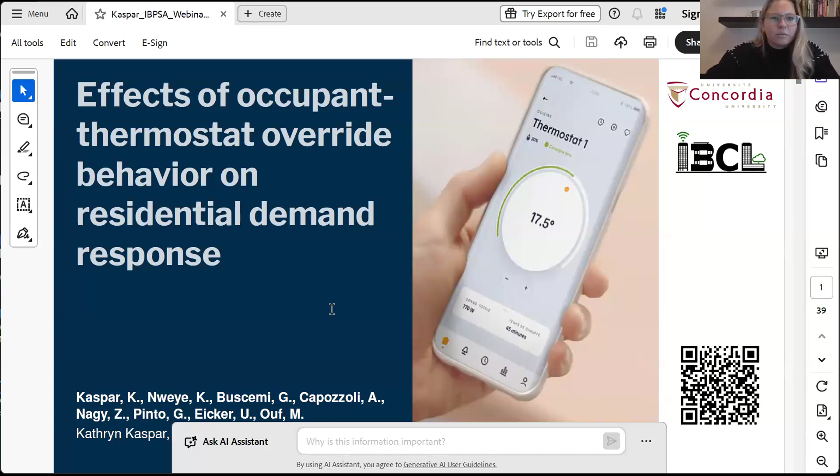Okay, perfect. I think it's Control L, Control N, Control H. Oh no. View, Control L. I was close. Okay, can you see everything now? Just maybe minimize this. All good, Aisha? You can see everything? We're good. Yes, go ahead.

Okay, thank you. Great, thank you for that intro, that was so nice. As Aisha mentioned, my name is Kathryn Kaspar. I'm a PhD candidate at Concordia University in Montreal. Today I'm going to be presenting a paper we published about a year ago called The Effects of Occupant Thermostat Override Behavior on Residential Demand Response. These are the co-authors for that paper. I'll talk a little about everyone's components a bit later, but the QR code here is a link to the full paper, and I'll mention it again later at the end of the presentation.

Okay, great. So as I mentioned, I'm in Montreal. I want to give a little bit of energy context here specifically.

Here in Quebec, about 95% of our electricity generation comes from hydropower. So what this means in terms of our local government and our goals for decarbonization is really that electrification is seen as our main key focus for decarbonization.

We also have about 54% of our annual residential electricity consumption coming from space heating. We have long winters here. And more than half of our residential buildings in Canada are single family homes, even higher percentage in the US. The idea here is that residential buildings together are responsible for a lot of electricity consumption, but each individual building doesn't necessarily have the biggest impact.

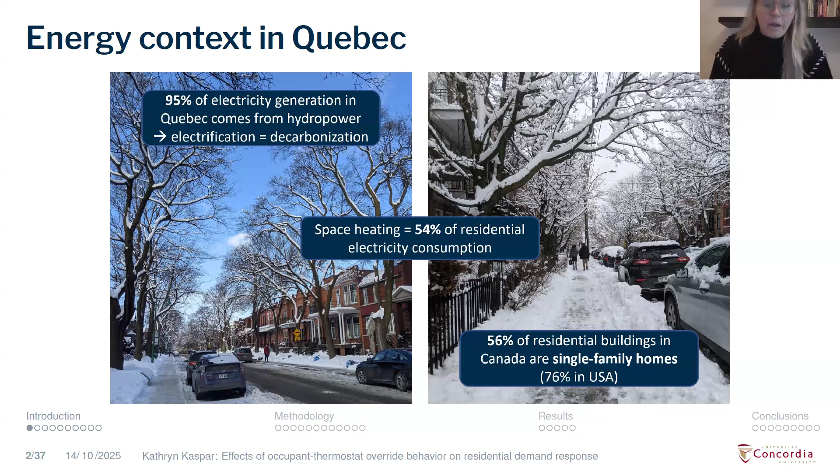However, when we think about residential buildings and being able to scale up and really collect them together to create energy flexibility potential, there's definitely a lot of opportunity there, looking on a scale of, let's say, 20 to 100 buildings or even more.

So our local utility provider, Hydro-Quebec, has really identified one of our key needs for flexibility, which is really shifting electricity away from these two peak periods. So what we see is from 6 to 9 a.m. and 4 to 8 p.m. in winter. We have these two peak periods, and this is generally when people are at home, when they're using appliances, and also when heating demands are higher.

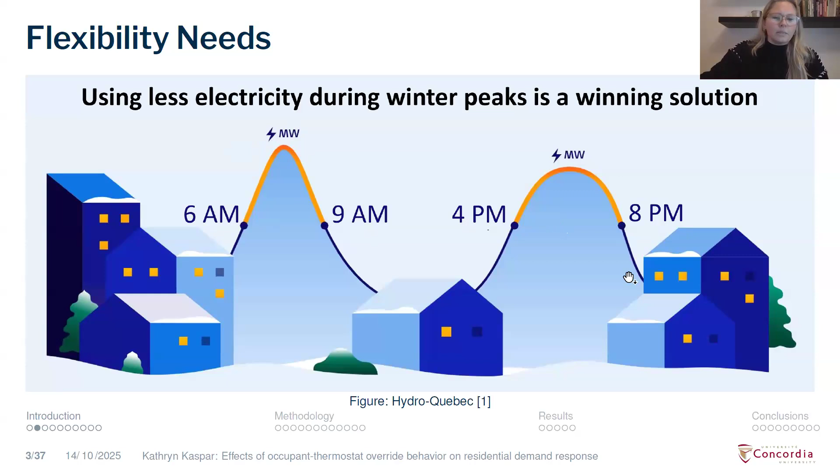So the key question becomes, how can we manage this increasing electricity demand? Two of the key solutions provided by Hydro-Quebec, our utility provider: one being the transition to diversified distributed smart grids. So as more and more houses have EVs or battery storage, how can we look at things like bidirectional flow and managing these types of loads to create some flexibility?

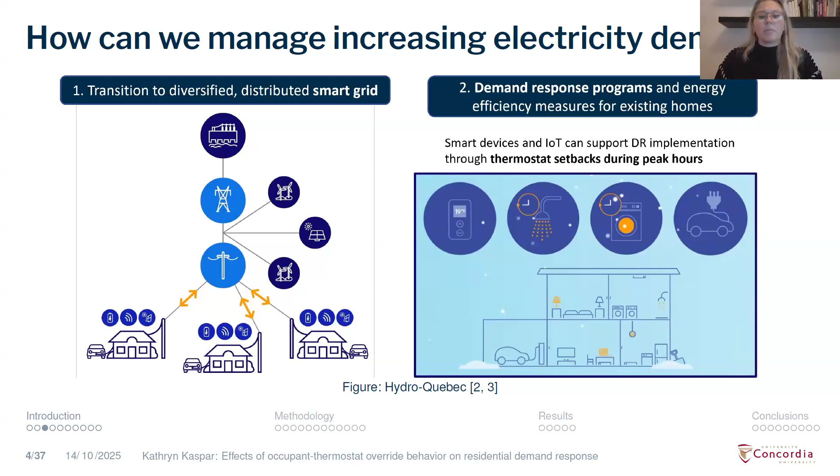And secondly, demand response programs. So what we're seeing is more and more smart appliances being integrated within homes. And thermostat set points specifically represent a really big opportunity for demand response.

So here in Quebec, actually, we have a very new program within the last 5 years or so. It's called Hilo, and it's a demand response program in which the occupants of a building can receive a free smart thermostat in exchange for participation in the direct load control, DLC, of their thermostats during specific demand response times in winter. This program is only 5 years old, and every year there's kind of an evolution of how we formulate this program.

But the most recent one had it so that the occupants can choose their setback, meaning a reduction to the set point, and either choose extreme, bold, or moderate during the upcoming demand response event. And the occupants have the ability to override their set point at any time.

So this program is super interesting, but with it comes some key challenges that we're looking to overcome. One being that the occupant override uncertainties make our demand response outcomes a little bit more unpredictable. The second one being that thermal discomfort can discourage continued participation. So if they're really unhappy with the way that the demand response program is being implemented, they're not likely to keep subscribing.

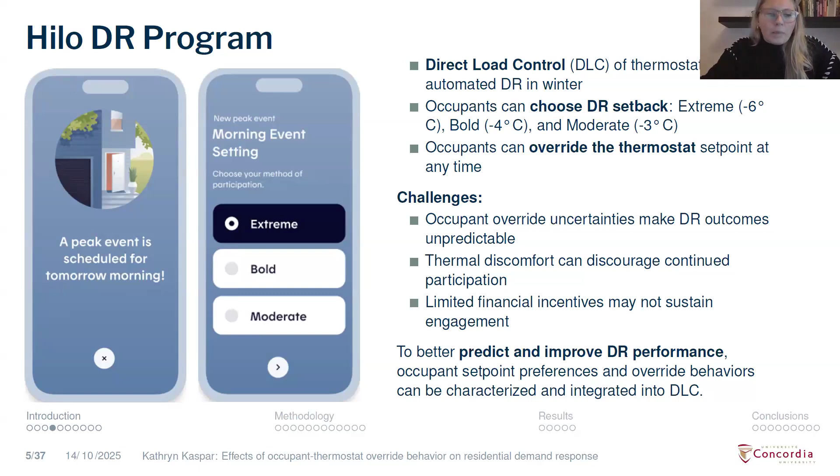So I just wanted to cover some of the basic tools that are used for the control of building energy systems, whether it be in simulation or in the real world. With rule-based control, this is typically what we see in most houses or even institutional buildings, whereby we have a set of rules that our HVAC system or our batteries are following. It's very easy to understand and implement, low computational demand, stable, but it's not really adaptable. We're maybe not harnessing things like occupancy in the way that we could, so we can definitely get better performance with some other methods.

One of those is model predictive control. This is a lot more popular in recent years, which optimizes control actions over a future time horizon using a predictive model. So with model predictive control, there's usually an optimizer, something that really tries to minimize or maximize an objective here. And we generally see some pretty promising results with that. It does come at a high computational cost, so it would require each building, let's say, to develop or calibrate a model that is able to be effective in predicting a future horizon.

So it can be resource consuming, and also maybe harder to scale across a neighborhood, for example, of 10 or 100 homes.

Another methodology that we have is reinforcement learning. With reinforcement learning, the idea is that it can learn optimal control through trial and error and interacting directly with the environment. So it can handle nonlinear or complex dynamics, and it can be adaptable to changing conditions, things like weather or building energy loads. But this is a purely black box approach, pretty much, so the decision-making process can be harder to interpret. And then there isn't really a guarantee that the optimal decision-making can be achieved.

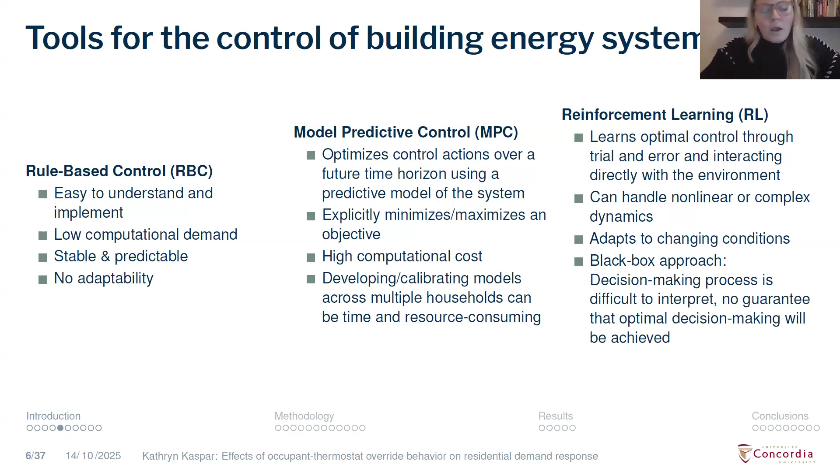So I'll give a little bit of background on reinforcement learning and what it is. The whole idea hinges upon having an agent, and our agent controls an action or makes an action. So in this case, it could be, let's say, a battery itself, and the agent is deciding when to charge or discharge a battery. Let's say it charges the battery by half of the maximum charging power.

Once that action is being done, the environment states, the S here, get updated. So what's going on in your environment, things like the state of charge of the battery, maybe weather variables, price variables that are important, and let's say the net electricity consumption of a house. Let's say that battery affects how much energy is being consumed at the household level.

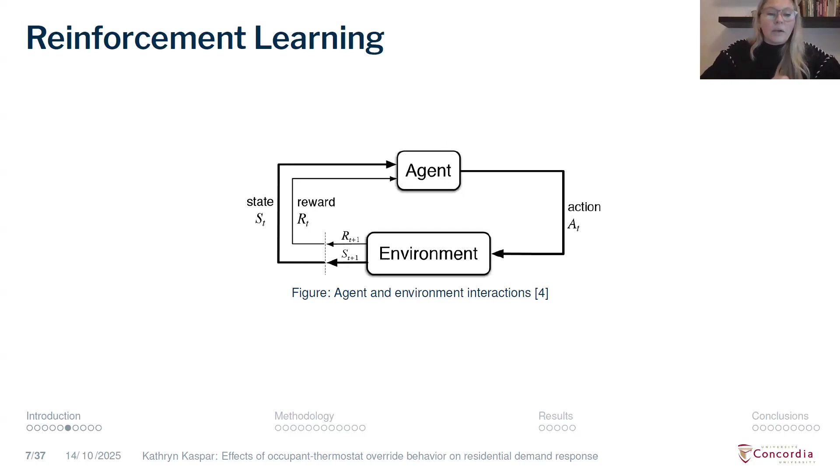And then the agent understands or learns how well it's performed on this action based on a reward function that is set by the user. So the reward function could be maximizing local PV production, or it could be minimizing electricity costs. But at the end of the day, it's through making lots of actions and linking those actions with potential rewards that the agent understands which actions lead to better rewards or better achieve the goals.

So I'll give a brief introduction of CityLearn, which is a simulation environment for implementing control. Originally, it was made to implement reinforcement learning, though other algorithms and rule-based control can also be implemented. The way it's structured is that you have X number of buildings that you specify as input, and within each building, you have this control environment where you basically specify which loads are controllable and which ones are not controllable.

CityLearn was originally developed by José Vázquez-Canteli about 5 years ago now, 6 years. And it really started as looking at the control of cooling storage or heating storage, domestic hot water storage, and electrical storage. So leveraging storage as your key source for energy flexibility. You don't need to worry about occupant preferences or anything like that because you're just kind of controlling storage.

A study by Giuseppe Pinto and Alfonso Capozzoli's group in Politecnico Torino integrated heat pump control within CityLearn. So this really opened the door for controlling more of the building energy systems.

And that was introduced a couple of years back. And so the heat pump modeling, all of that was integrated within Giuseppe's work. And that's where I came in, where I saw that and I said, okay, that's great.

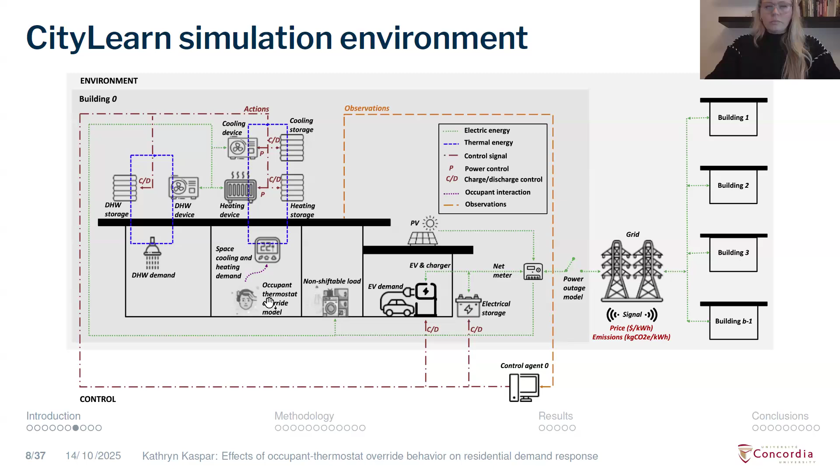Yeah, and just a little bit about our motivation. So when we look at previous studies, simulation focused more so, what we see is that most studies tend to overlook occupant diversity, kind of assuming uniform set point preferences.

We also find that most studies don't really consider occupants overriding the thermostat in general during demand response events, for example. And finally, when studies do go into more details regarding set points or override behavior, it's generally on a single building scale and not on a neighborhood scale, looking at those effects together. So that's what we wanted to do with this work.

I've included the learning objectives for clarity. The idea is that after this presentation, everyone would be able to apply data-driven approaches to characterize thermostat set point preferences and override behaviors using thermostat data, distinguish between different levels of detail for occupant thermostat behavior modeling, and implement a multi-agent reinforcement learning-based control that balances occupant thermal comfort needs with energy consumption goals.

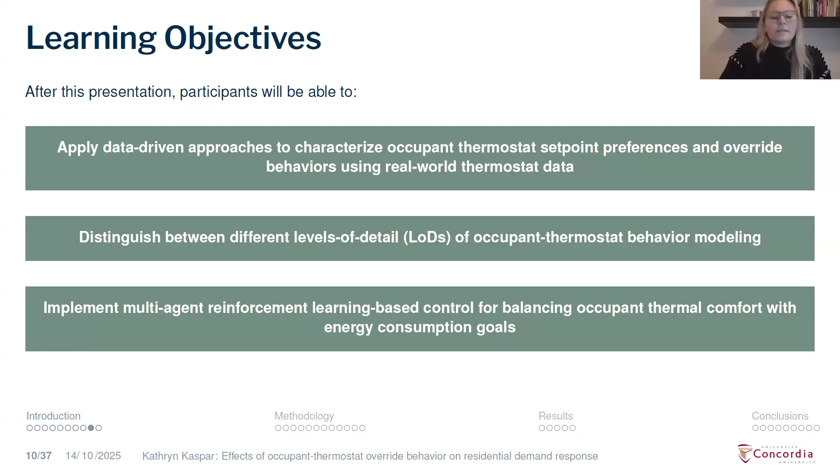So I've divided my methodology into two main research questions. I'll start with number one: how can we model occupant thermostat override behavior? And then, once we've done that, how can we incorporate that into a control scheme for direct load control?

The first thing we did was look at the ecobee smart thermostat data. This dataset is more than 8 terabytes worth of thermostat data across 200,000 households across North America. In Quebec specifically, we were working with about 700 houses, and I was only looking at the heating season for this study.

Within this dataset you have a lot of different variables, like indoor air temperature, set point temperature, the hour, time of day, HVAC mode. You also have a variable that indicates the program or event, so sometimes you'll see things like home, away, or a specific person's program, like Kathryn. These are programmable by the user. Within this column there is also an indicator for a hold, which represents some time step where the occupant deviated from the set program.

We call a set point override the first time step where a hold is initiated. What we did was a simple k-means clustering, looking at what the average indoor air temperature was during a set point override, and we came up with two main clusters.

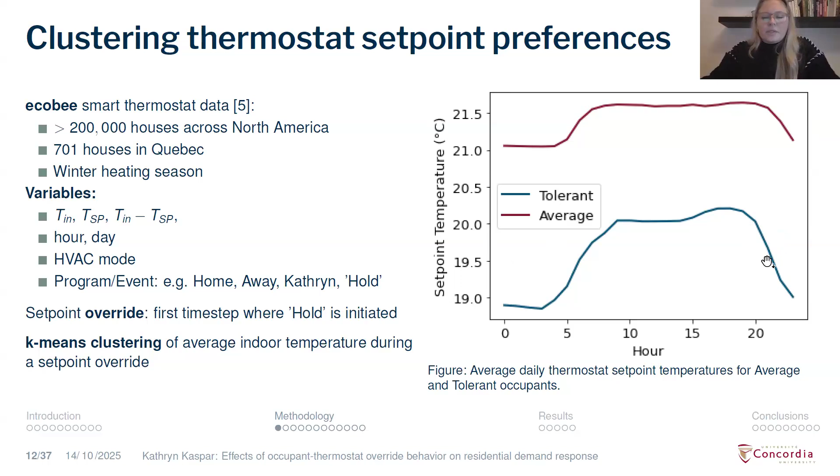So once we have those, we need to look at the override behavior itself. Why is thermostat override behavior so difficult to model? There are many reasons, but I think three key ones: firstly, overrides are very infrequent, less than 2% of time steps have an override, so it's really highly unbalanced data.

Secondly, occupancy data is very unreliable. At best, a house with an ecobee thermostat might have one occupancy sensor, but if the occupant is in a different room or asleep, that's not going to be triggered. We know that knowing occupancy can help us know when overrides will occur, so not having that data is a real difficulty.

Thirdly, poor thermostat usability. Despite improvements, thermostats are hard to use. We see in the data sometimes that people are just trying to turn off the heating in their home, so they increase the set point by something like 10 degrees Celsius. It's not that they actually want the temperature to increase; they're just trying to get the system to do something it's not doing. Unfortunately, all that odd behavior makes its way into the data we're working with, which is another thing you have to tackle when modeling override behavior.

To overcome some of these difficulties, one key method we use for modeling the probability of an override is univariate logistic regression curves. This is from another study by Burak Gunay, where you have your dataset and you're plotting what the probability of a set point increase would be in the next 15 minutes. By looking at it on a time frame, you fit a logistic regression curve based on the probabilities of a set point increase.

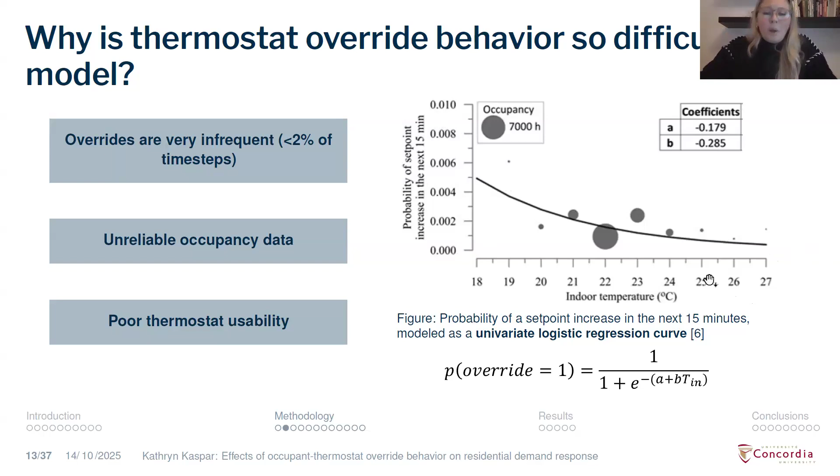It's really just fitting a probability curve based on the indoor air temperature. So we chose to use this methodology as well, but we adapted it for different times of day, to account for the fact that more overrides occur during morning and evening periods when people tend to be at home. So I looked at the probability during these 3 periods separately.

What you can see in these curves is that for the average occupant in the morning and evening times, as the indoor air temperature goes down to roughly 18 degrees, you have about a 50% probability of a set point override within the next hour. As the temperature goes down further, that probability increases. For midday and nighttime periods, that probability is slightly lower, based on the data we had.

Finally, we added a curve to demonstrate the probability of a set point decrease. We only did one curve for this because we're focusing on a winter heating scenario, so we hope our indoor air temperature doesn't reach 25 degrees—otherwise something is going wrong with our control. But there's a curve there to decrease the set point in the event that does happen.

We did this for both the average and tolerant occupants. For the average occupant, you see the probability start increasing right around 17 or 18 degrees. Whereas for the tolerant occupants, the probability doesn't start increasing until a little bit lower, roughly 17 degrees Celsius—so slightly different probabilities depending on occupant type.

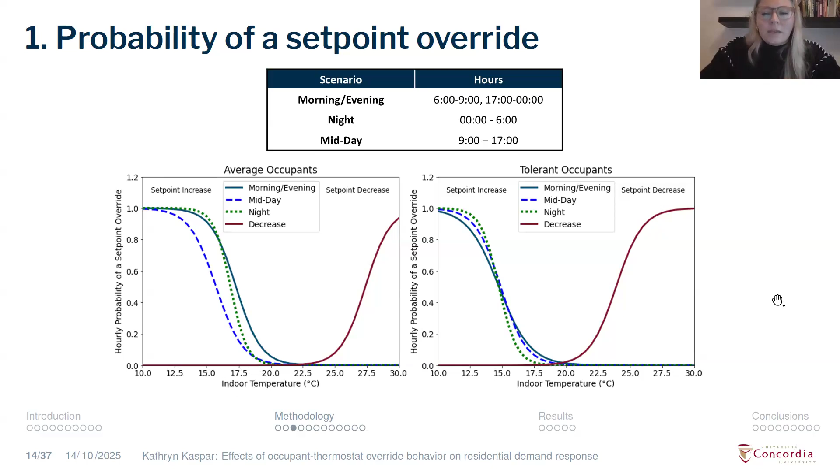The second part of this is: if there is an override, by how much is the set point changed? I'd refer you to the paper for more on these models, but we trained a pretty simple machine learning model using random forests. It could have been randomly sampled instead—this is all very modular, you could swap this out for something else. We decided to do it this way.

We used a couple of input variables: the set point temperature one hour previously, and the deviation between the set point and the indoor air one hour previous, to tell us basically whether it's a large or small override to the set point. That's what we integrated within the control. Again, this could have just been randomly sampled, but we chose to do it this way.

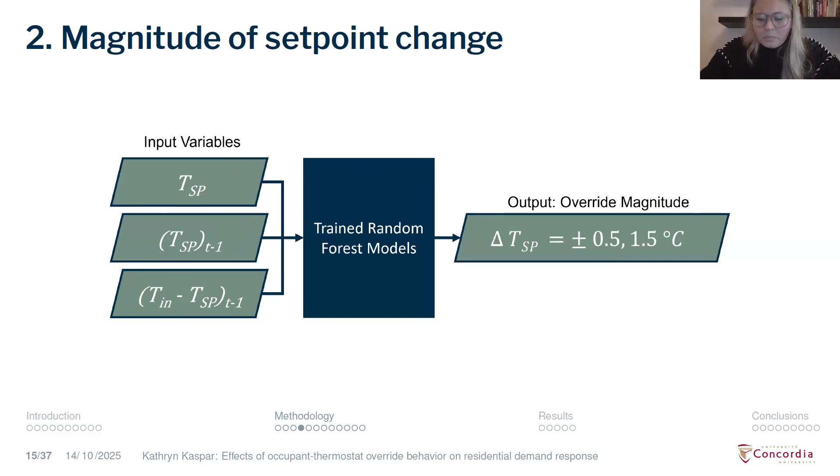So once we've modeled the override behavior, the next part is how do we integrate this into the control? I'll give an overview of the application first.

We wanted to do automated heat pump control for 10 houses in Montreal, simulated in CityLearn, which I mentioned previously, using reinforcement learning-based agents. Our idea with reinforcement learning is that we have these 2 occupant types, the average and the tolerant, and we want our agents to learn the different behaviors of those 2 occupant types. That's why we chose reinforcement learning.

We also look at 3 different occupant levels of detail—I'll talk about that in the next slide. This is for the winter heating season, January 1 to March 31st. For our demand response, we implemented thermostat set point reductions during specific demand response events, which I'll detail a bit later.

For our KPIs, we wanted to look at net electricity consumption during our demand response periods, electricity cost across the entire testing period—the 3 months we're looking at—the number of overrides, the deviation between the set point and the indoor air temperature, and also ramping, which is our time-step-to-time-step change in electricity consumption across the entire neighborhood. We wanted to characterize that to see how the neighborhood-level performance was working.

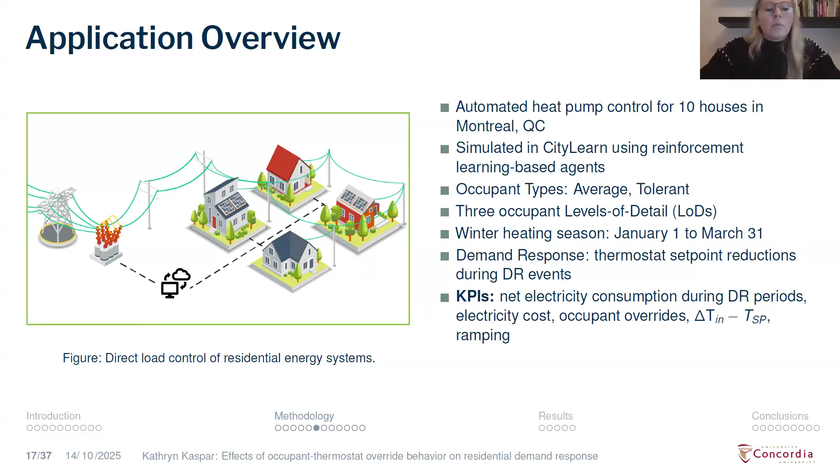So yeah, the occupant levels of detail. This is really important because what we wanted to understand was how the overrides affect our overall performance. Our LOD1 is our scenario with no control of the heat pump at all and no demand response set points. So this is our benchmark baseline LOD.

Our LOD2, we have control of the heat pump itself, and then we have implemented setbacks, set point reductions for demand response, but we don't allow the occupant to override the set point. LOD3 is the same thing, except that we do allow for overrides in the case of LOD3.

What this looks like is that we have an RL agent, which I'll describe the RL environment and everything in more detail further on, but the agent decides for each house how much heat pump heating supply power to give at a certain time step. We have a thermodynamics model that tells us what our indoor air temperature is for the households as a result of that action. And then our set point gets updated accordingly for each hour that it happens.

Again, in the case of LOD2, there's no override. But LOD3 really introduces these override models based on the indoor air temperature. Is our occupant comfortable? Are they overriding the set point or not? If it is an increase or decrease, then we decide how much it is, if it's a large increase or a small increase. And then our set point gets updated, and then our agents make their actions accordingly. So that's the variation that we want to see for the study.

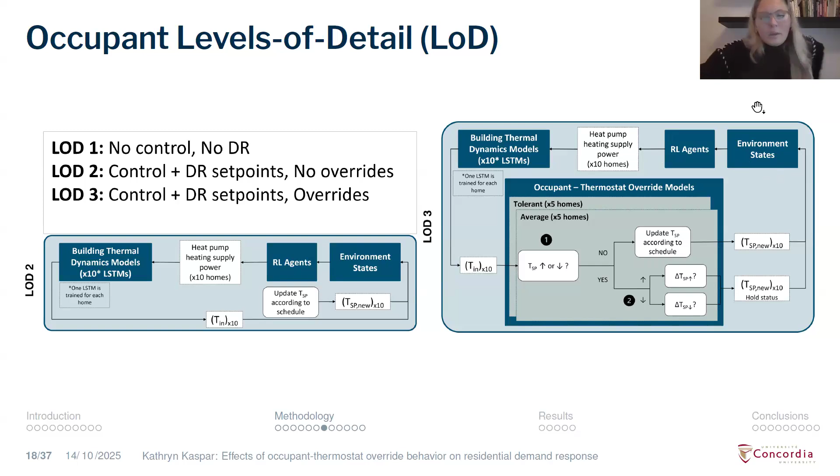So this is our thermostat set point schedules. To implement the demand response, we use reductions to the thermostat set point. What we have here is our set point temperature. My estimations in Fahrenheit were slightly off between the two, I was doing that kind of on the fly. But you have here in Fahrenheit and Celsius what our set point profiles look like for our two clusters, this one being the average occupants and these ones being the tolerant occupants.

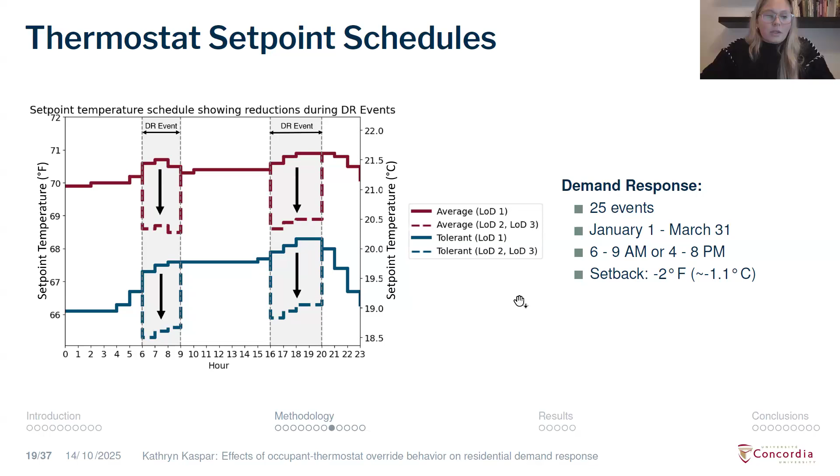We've selected very specific times where we're implementing a demand response event. So we have about 25 events between January 1st to March 31st, where we've selected either from 6 to 9 a.m. or 4 to 8 p.m. We've reduced that set point from its schedule by 2 degrees Fahrenheit or about 1.1 degrees Celsius. And we've actually specifically chosen the 25 events based on when the weather was like the most critical, the coldest, during that time period. So just those 25 events.

We also have building thermodynamics models. We use LSTMs to approximate our changes in indoor air temperature at each hourly time step. This is developed based on a methodology by Alfonso Capozzoli's team in Italy. I'm not going to spend more time on those, but we have a lot of details in both Giuseppe Pinto's paper as well as our paper. The occupant override models, which I've just described previously, so again this kind of two-step part to the overrides of the probability and then the magnitude.

And then finally, we have CityLearn, our control environment. So I will talk in more detail about how we implemented the reinforcement learning-based control.

A brief summary of our case study building. So we used the ResStock building, the ResStock data which gives us Open Studio models, which we then converted to Energy Plus models. And then we did some clustering just to have a lot of variation for each household that we considered. So as you can see, the year that it was built, the insulation rates, all of this is quite varied for each of the households.

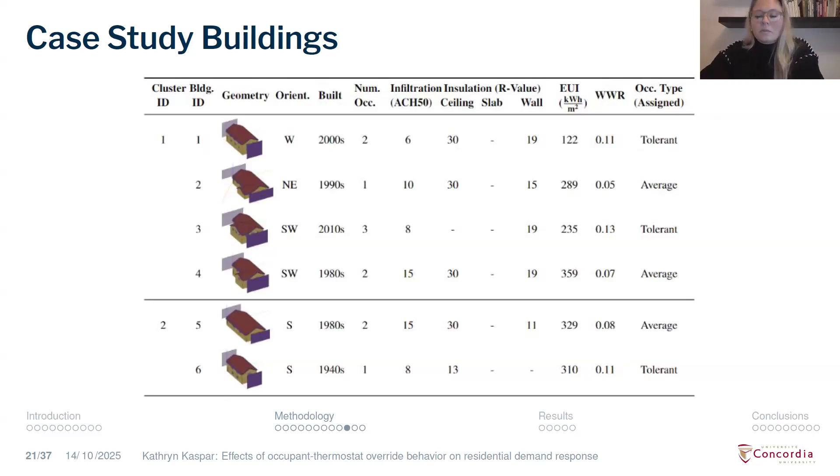Next, I'm going to talk about the reinforcement learning-based control that we implement in CityLearn. Our agent's goal is to decide at each hour what proportion of the maximum heat pump heating supply power to provide. We have one agent controlling each individual house, so 10 agents for 10 houses.

In order to make that decision, they have access to variables in the observation space: the time, the day, the hour, the outdoor air temperature, the upcoming outdoor air temperature, electricity rates, upcoming electricity rates, and the net electricity consumption of the house at each hour.

Also included is the indoor air temperature and the set point temperature. The idea is that if we had a building automation system for the household, these would be reasonable variables to have access to, not something like the electricity consumption in 1 hour or 2 hours, for example.

Our agent learns the optimal actions based on this reward function we've crafted. What we have here in this curve is our set point—again, just a theoretical curve, not the actual one. In the dashed lines is a band, a plus or minus 2 degrees Celsius band around the set point, and the star shows our indoor air temperature.

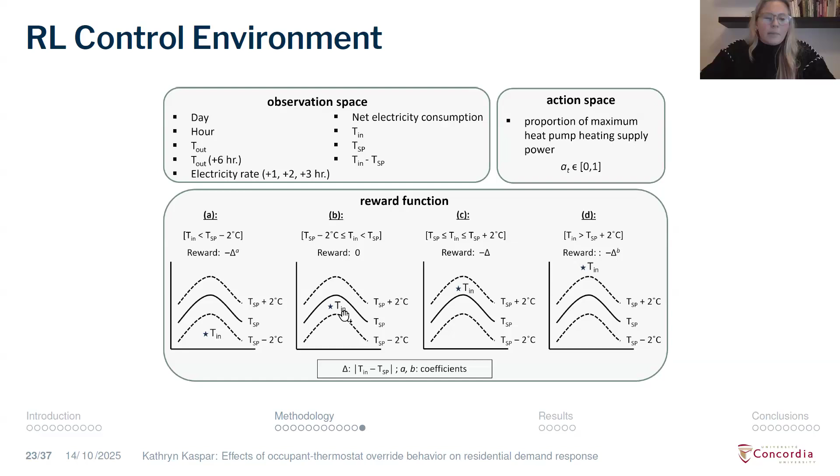So I'll give some summary of the results. I'm going to present these KPIs across the entire 3-month testing period, all normalized by our baseline, LOD1. What we can see here is our LOD2 with no overrides has about a 15% reduction in electricity cost, while LOD3 shows about a 12% reduction.

Again, we used time of use pricing, so with that control we do see a reduction in electricity cost for the consumer—there's some benefit for participation there. As expected, net electricity consumption also decreased. Again, this is across the entire testing period; we'll look later at the specific demand response periods, but we see about an 8% reduction for LOD3 and 11% for LOD2. Average daily peak also shows a bit of a change between the two.

For ramping, we do see an increase. It's worth mentioning that for LOD2 with no overrides, our ramping—the time step to time step change in net electricity consumption across the cluster—was only a 5% increase, but with overrides it was a 17% increase. This is worth mentioning because ramping was not our primary KPI, but if that were your key grid objective, the reward function could be tailored to consider the indoor air temperature and set point, as well as minimize ramping.

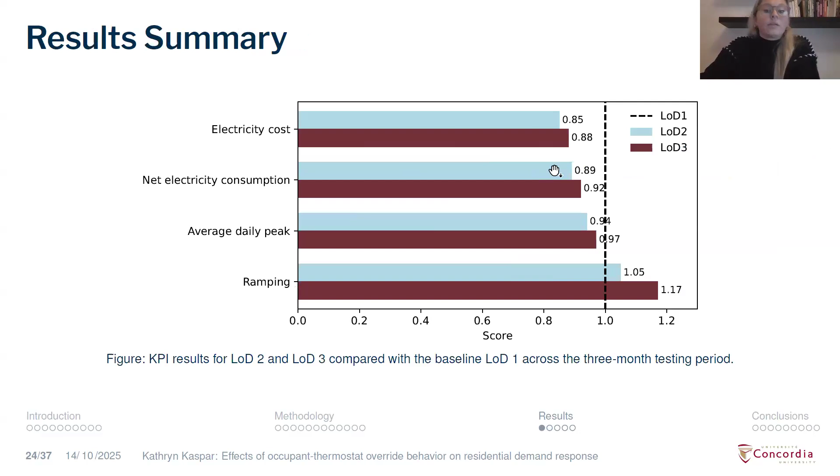So sometimes our agent action is just not going to be as good in terms of performance for LOD3 and allowing for the overrides. Sometimes there is some compensation by the agent. For example, if there are multiple overrides, it tries to heat up the building a lot to compensate, and that also affects ramping. This is just what happens when you're working with reinforcement learning or control in general, or stochastic behavior from the occupants. So it's not unexpected that we see some variation in performance amongst the buildings themselves. They also have different demand profiles, so some actions may be easier to anticipate or make decisions for than other buildings.

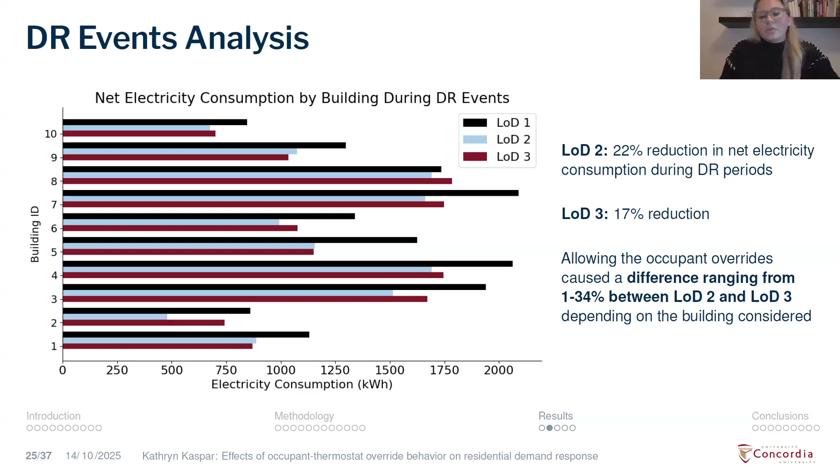Finally, we wanted to show the load shaping curves before and after the control. In these 3 curves up top, the black one is our LOD1, our baseline during the days in which a demand response event occurred. LOD2 is in blue just below it, where we can see substantial reductions, especially during these red periods. And likewise for LOD3, not quite as substantial, since overrides are allowed, but when we look at the difference between LOD1 and LOD3, it's still quite substantial.

The reason the days with demand response have a much higher net electricity consumption is because we specifically implemented the demand response on the coldest days during that 3-month period. That's why our average electricity consumption is higher during those days, and we can see the resulting reductions after the control. Below in the dashed line, it represents our days without demand response, the less critical weather days, which is why these curves are slightly lower.

We see our LOD1 in black here, and we do see slight reductions in electricity consumption even on the days without demand response events. This is because of our reward function, we're telling the agent to keep our indoor air temperature slightly below the set point, resulting in some slight reductions even outside of those demand response days. But again, less so for LOD3, where you still have overrides that can occur.

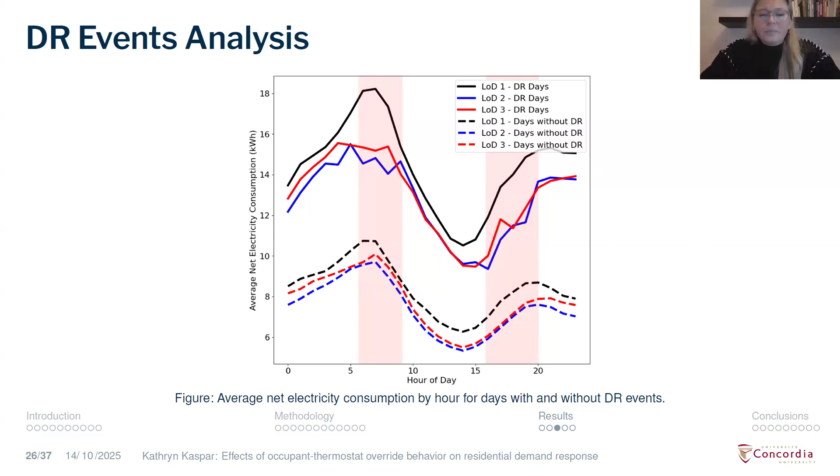Lastly, we wanted to characterize how much our set point deviations were. We called the unmet set point hours the time periods where the indoor air temperature deviated from the set point by more than 2 degrees Celsius. We found that for LOD2 it was very, very small, so 99% of our time steps had a deviation less than 2 degrees. For LOD3 with the overrides, it was still great, more than 95% of our time steps had a deviation less than 2 degrees, but not quite as good as LOD2, which is as expected.

So what this graph shows is a heat map, showing the number of occurrences for each building where the deviation occurred within these ranges. The darker colors, really concentrated from 0 to 1, or -1, show that the agent was really able for LOD2 to keep the indoor air temperature just below the set point, within a half a degree of the set point basically, which is exactly what we wanted our agent to achieve.

LOD3, we still got great results, but we can see that it's spread out a little bit more. When you allow for the overrides, that means the set point can change by 1.5 degrees in one time step, so it does take time to achieve that new set point again, so we see it a little bit more spread out. But ultimately, the darkest colors are concentrated around where we want them, indicating that our indoor air temperature is at or just below the set point.

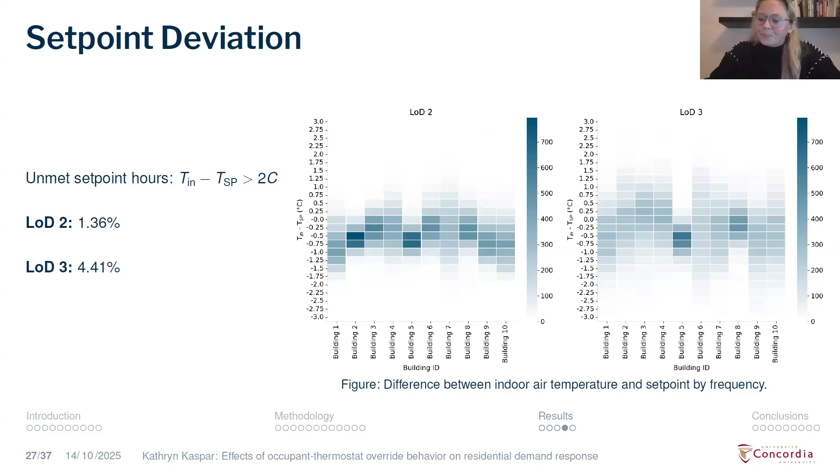I wanted to show the number of overrides during our training phase for the agents to really show the agent learning process and how it's able to understand optimal decision making. So what I have here is the number of overrides that occurred during our training episodes. We have 10 training episodes, each about 6 months of training data, which is not the same data used for testing. We cycled through this training data 10 times so that our agent could continue making decisions and learning from the overrides what decisions to make.

The darker colors represent the bigger overrides. Regardless of whether it's a tolerant occupant or an average occupant, it starts off in the first episode with a lot of overrides, and by the 10th episode the number of overrides goes down significantly, along with the magnitude. So by the end you have far fewer large overrides, which shows our agent being able to learn optimal decision making.

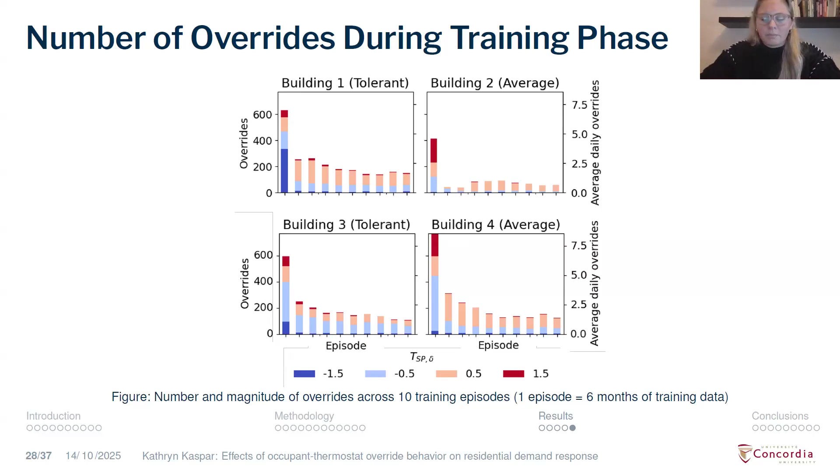Our key findings: even while allowing for overrides in LOD3, we achieved significant electricity savings, which is very promising for both of our occupant types. On average, our LOD2 could overestimate savings in net electricity consumption, cost, and peak demand by about 5% compared to LOD3. So allowing that override flexibility, we expect the savings are not as much as when you don't allow for overrides, about a 5% difference across the whole 3-month testing period. And finally, ramping was increased by LOD3, but future work could incorporate this into the reward function differently, depending on grid objectives.

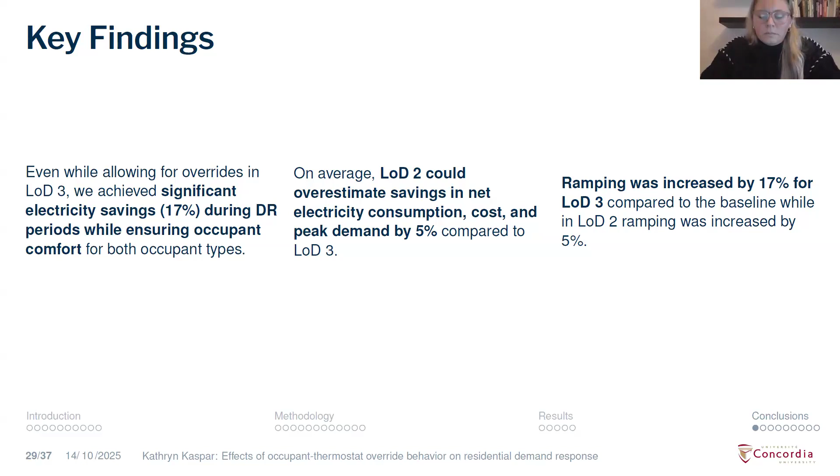Limitations: we use a lot of submodels here. The occupant override models come with their own assumptions and errors, and our building thermodynamics models, the LSTMs themselves, have their own assumptions and errors. So we're coupling a lot of these together. If we were to implement this in a real life application, we'd expect completely different results—it's not going to translate to exactly a 17% reduction in electricity savings, but it's intended for scenario modeling. What if override rates increase a bit more? How do we structure our algorithm or decentralized reinforcement learning approach to handle these different behaviors? That's what we're trying to achieve with this.

Because of the structure of the reward function, this application requires that occupants change their schedules manually in the event their preferences change, rather than the agent learning their new set point preferences. This is something future work could incorporate or change—right now it's focused around having a set point schedule, but the agent is trying to match the indoor air temperature. It would be really cool and optimal if your agent could implicitly learn which set point to make the schedule based on your occupant and their interactions with the thermostat. That's a great area for future work.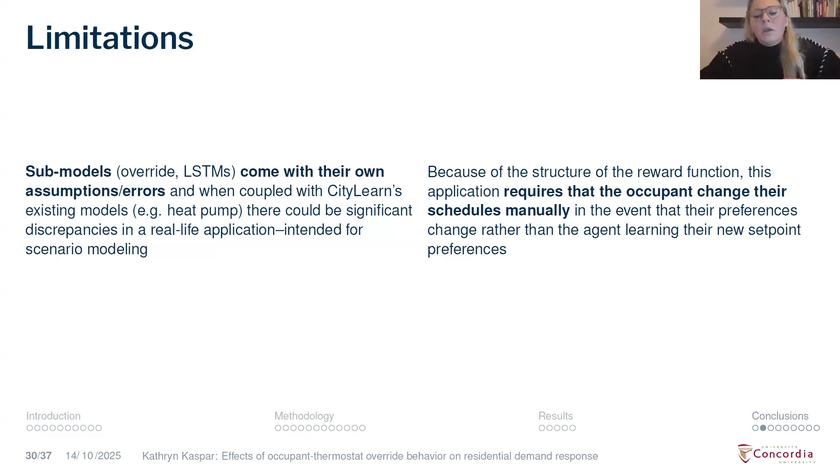To summarize, our main research contribution, at least at the time we were doing this, we believe was the first study that incorporated a data-driven occupant thermostat override model into HVAC control. We did this using a multi-agent reinforcement learning approach capable of handling multiple occupant types. We considered unique household thermostat preferences, and we showed that we were able to learn optimal decision-making across different override behaviors.

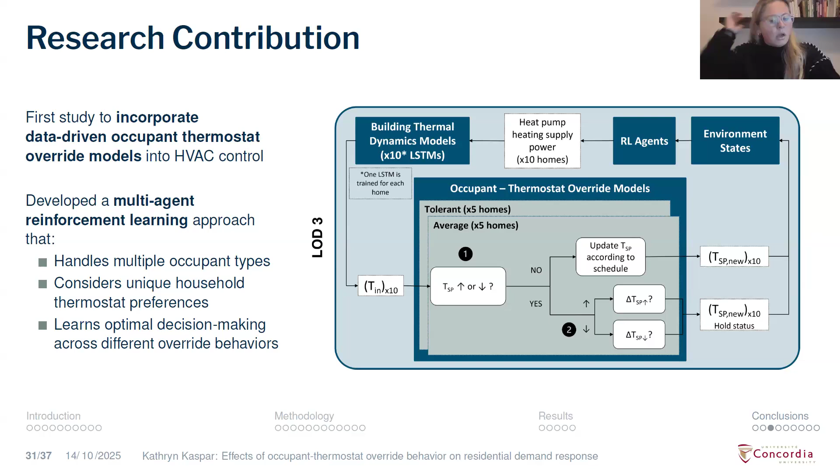This is where it gets more interesting. The implication here for stakeholders: the point of setting up this kind of control is so grid operators can understand how to tailor demand response programs accordingly and harness as much flexibility potential as possible—what kinds of prices, how prices affect this, is a very interesting question. For policymakers, understanding smart thermostat deployment, the value of it, what they can provide in terms of flexibility. And finally, for the consumer, there's definitely potential cost savings without necessarily compromising thermal comfort. That's what we've been trying to demonstrate.

And so for future work and applications, there are so many different ideas that we have.

I'm wrapping up my PhD, so my goal here is to inspire, and I hope someone else will take on some of these ideas. One is integrating more reliable occupancy data to really exploit the away period. We did not give our agent information on whether the building is occupied, since we didn't have a very good way of knowing this. Better occupancy data could incorporate this further, and you could definitely get a lot more energy flexibility with that.

Secondly, as I mentioned, analyzing different reward functions to satisfy alternative grid objectives has a lot of potential. How demand response flexibility potential varies regionally is a super interesting question. Here in Montreal, these were our two clusters for Quebec. We didn't really look at a case for a sensitive occupant, but I think this is a very important question.

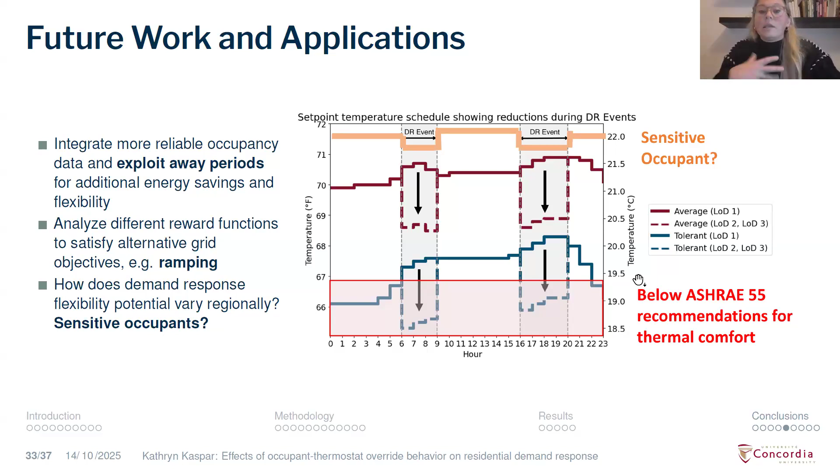Finally, I want to shout out Kingsley's work here. If anyone's interested in pursuing this further, his paper, presented at IBPSA in 2023, talks about how to completely replicate this study — the framework for designing representative neighborhoods in CityLearn across three regions in the US: Vermont, California, and Texas. We did the clustering using the ecobee dataset for Vermont and Texas. For Vermont it was a heating scenario, and in Texas a cooling scenario. The ResStock dataset from NREL has more than 500,000 OpenStudio models, so to replicate this whole portion of the study, Kingsley did a great job outlining that for anyone else to take a look at.

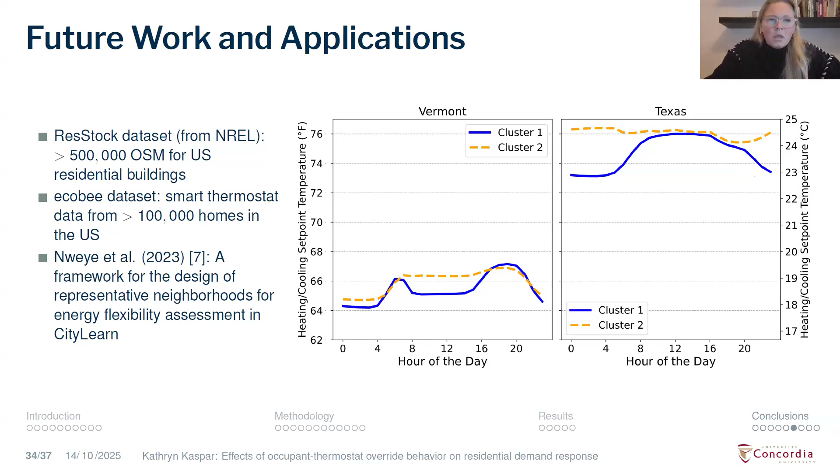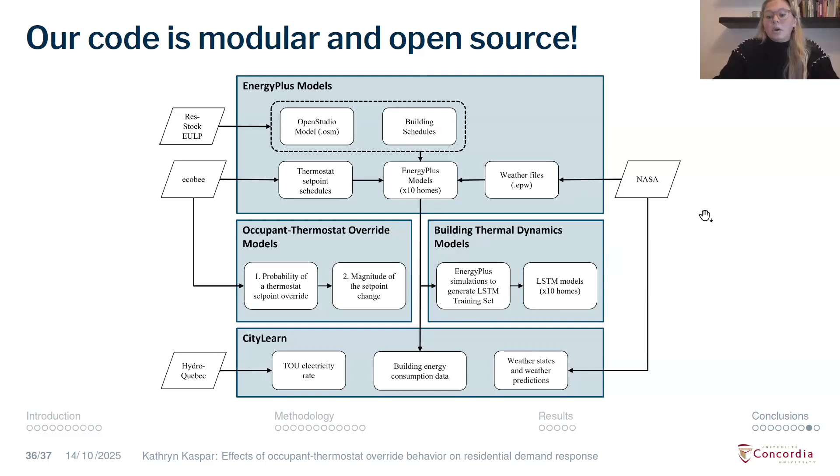I want to stress that our code is modular and open source. So if you don't want to use an LSTM model and you have RC models you want to use instead, great — it's intended to be replicated using other models and other buildings, and it's open source, you can find everything on the CityLearn GitHub. Kingsley has a paper on the latest version of CityLearn and its capabilities, because beyond overrides and heat pump control, there are other controllable loads within CityLearn. Tiago Fonseca's work integrated EVs within CityLearn, which is super cool, and their team is leading more recent developments, publishing the latest version later this week on PyPI. I just wanted to link them there, and you can access the GitHub here — I'd be happy to take any questions.